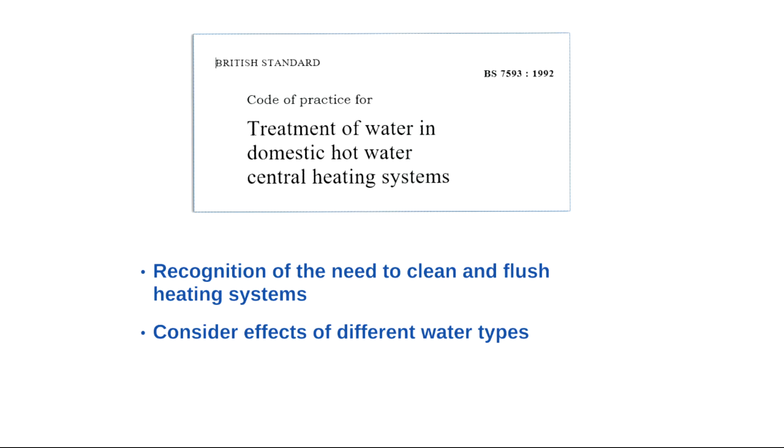Why is 92 important? Well, 1992 is the first year that British Standards released a code of practice for treatment of water in domestic hot water heating systems. This is BS 7593. So back then, what were they saying? Well, firstly, they were saying that they recognized the need to clean and flush a heating system. Secondly, they asked you to consider the effect of different water types on a heating system, whether that be soft water or hard water.

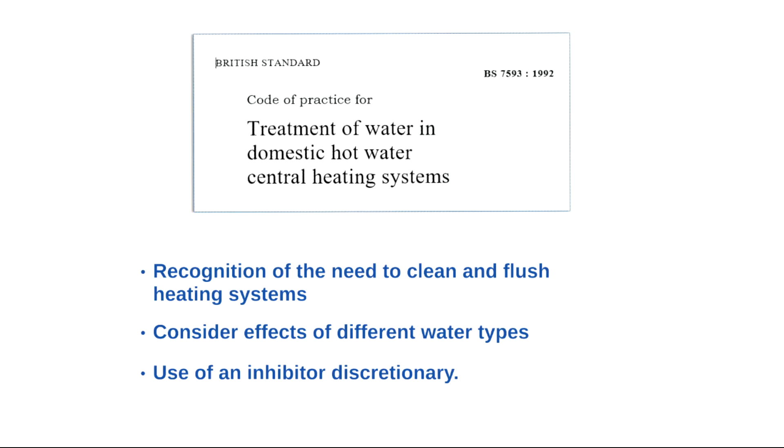Thirdly, but most important, is that they actually left the choice of whether or not to use an inhibitor to you guys, to the installers. It was only discretionary. It wasn't included within the code of practice. So we've moved on from that point, surely, haven't we?

Well, I guess all you guys have, because you're sitting here watching a best practice water treatment webinar, and I guess if you haven't moved on from that, then you wouldn't be sitting here now. But actually, many systems installed today are still installed not with 1992 recommendations, but actually pre-1992 recommendations.

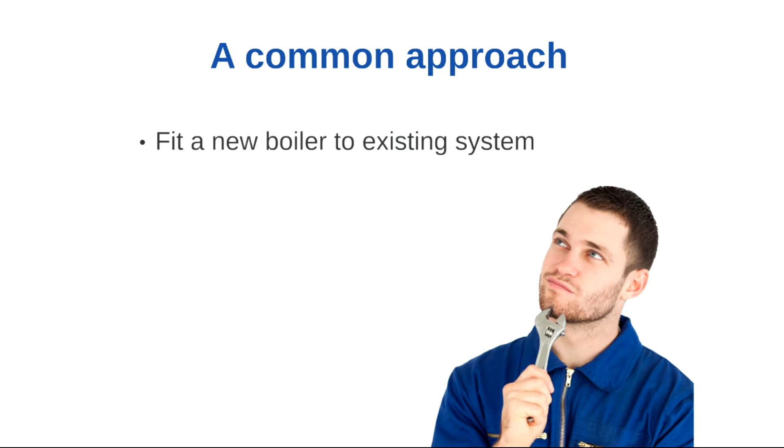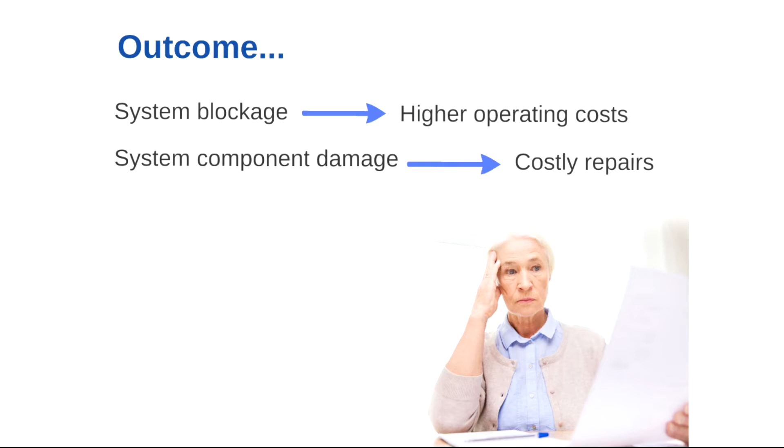So, in fact, it's actually quite common to find that someone will fit a new boiler onto an existing heating system, just simply allow for any energy efficiency losses. They won't bother to clean the system, and then just repair and maintain that as and when it's necessary. Now, all you guys, professional heating installers, will know the outcomes of that quite clearly. System blockages leading to high operation costs, system component damage, costly repairs, but probably most important of all, the heating isn't going to be available for your customer as and when they need it.

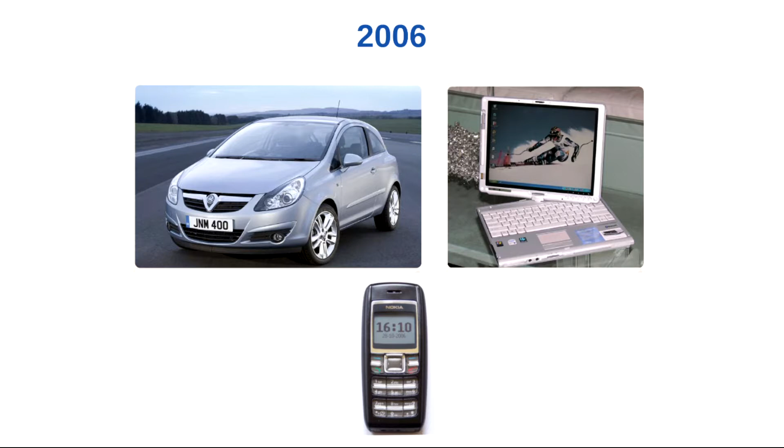So let's jump forward to 2006. So here we are 14 years later, and What Car are now advising you to go out and spend your money on a Vauxhall Corsa? Fujitsu had this marvelous PC with a whole 1 meg of memory, and fortunately the Nokia 1600 slips a little bit easier into your pocket.

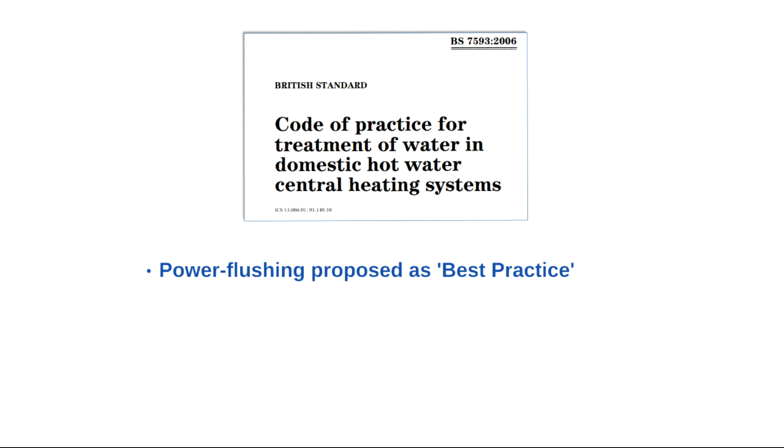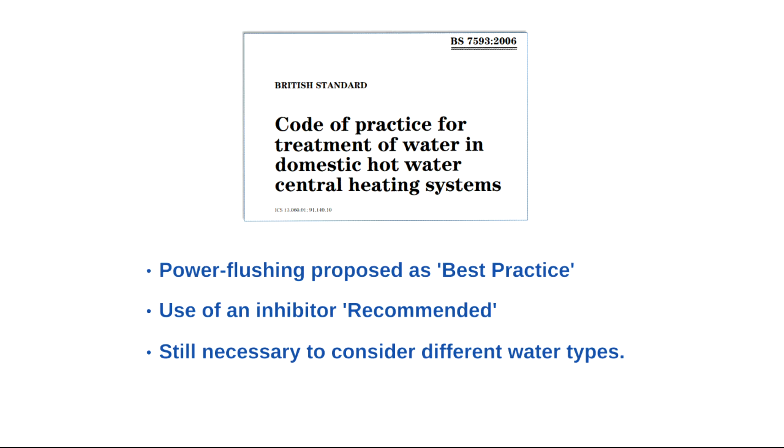This is the year when they made their next amendment to BS 7593. So what did they then bring in? First of all, they proposed that power flushing was the recommended best practice for cleaning a central heating system. Now think of that. Power flushing was proposed as the best practice back in 2006, 10 years ago. Use of an inhibitor is now recommended within this code of practice, but it's still necessary to consider the different types of water that you may be filling your heating system up with.

Well, we all know that power flushing, the recommended best practice, is still used very much today. And if you power flush a system, absolutely you'll be able to get the system clean. However, you have a high purchase price for the equipment in order to do the job. You can spend upwards of 5 hours on site to undertake a clean in a normal domestic building. And of course, the more time you spend on site, the higher the cost is going to be that you need to pass on to your customer.

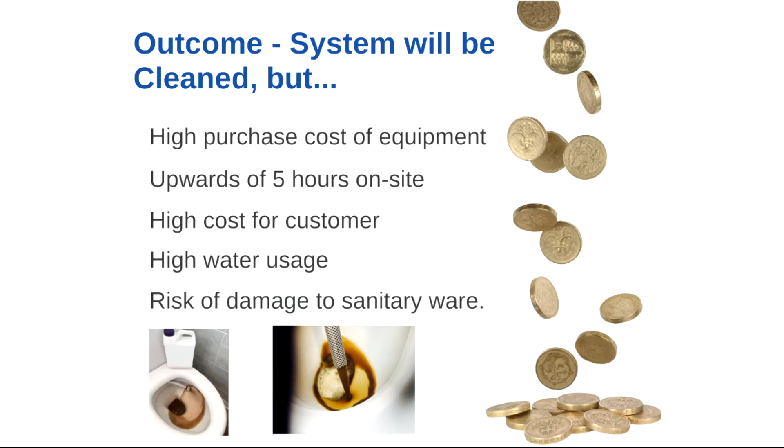You have high water usage due to the dynamic flushing process involved within power flushing. This is where you're constantly filling up the system as you flush the dirty water to drain. And you have risk of damage to sanitary ware. Again, this isn't recommended practice, but it's actually quite common to see that somebody will stick the outflow from a power flush down the nearest available entry to drain, which is very often the customer's sanitary ware.

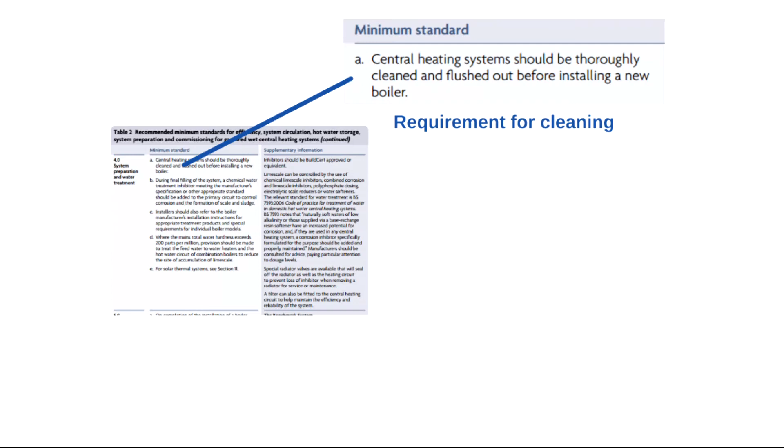So where do we look today for best practice in heating systems? Well, the first place we can look is in the Domestic Building Services Compliance Guide for Part L of Building Regulations. The interesting point is that now this is starting to talk about water treatment within regulation rather than within recommendation. So let's have a look at what they say inside here. Firstly, they say that a heating system should be thoroughly cleaned and flushed before installing a new boiler. So there is a requirement for cleaning.

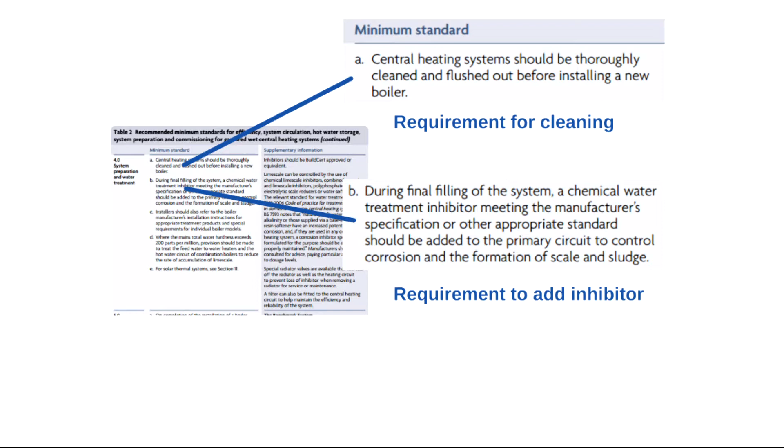There's also a requirement to add an inhibitor. So we're now saying that during final filling of a system, a chemical water treatment inhibitor meeting the manufacturer's specification or other appropriate standard should be added to the primary circuit to control corrosion and the formation of scale and sludge. They also now give a recommendation to include a filter on a heating system. So we're all moving in the right direction.

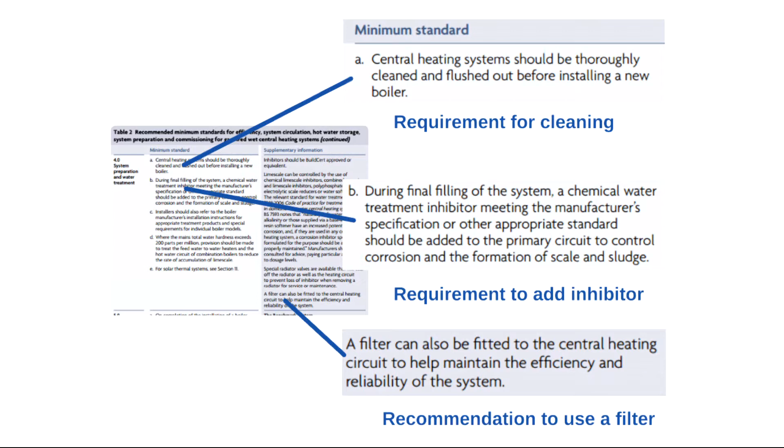Where else can we look? Well, we can look to the HHIC, the Heating and Hot Water Industry Council, who publish advice on their website of the correct use of water treatment. So what do they say?

Well, firstly, they say that a system should be cleaned and an inhibitor added to prevent corrosion and the formation of limescale. They also say that you should fit a filter, not a recommendation. You should fit a filter to maintain the efficiency and reliability of the heating system. They get a little bit more technical on the types of water, and they give some specific advice.

And that advice is, if you have a water softener installed in your house, you should fill up your heating system via the bypass that should be fitted when you install the water softener. So that actually shouldn't be any more onerous for you guys as installers to do when filling up a heating system.

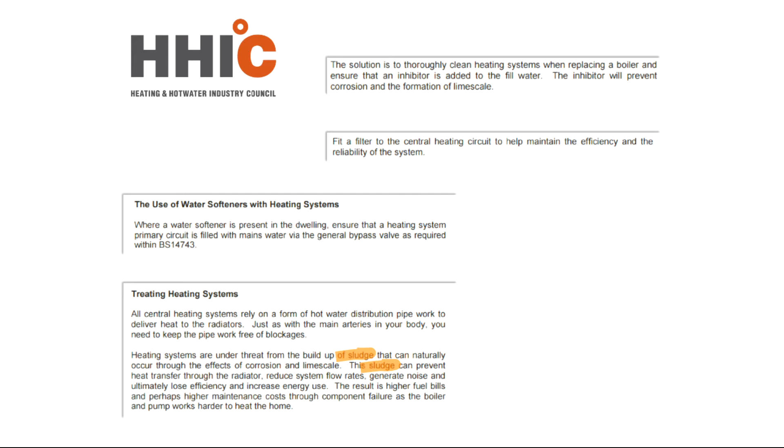Equally importantly is they start to really recognize that there's one component within a heating system that causes you most of your problem, and that is sludge. Sludge is the magnetite, the black magnetite sludge that you find within a heating system, which is the corrosion product of iron. This is an iron oxide. It develops within a heating system, specifically within radiator panels. Very, very big source of

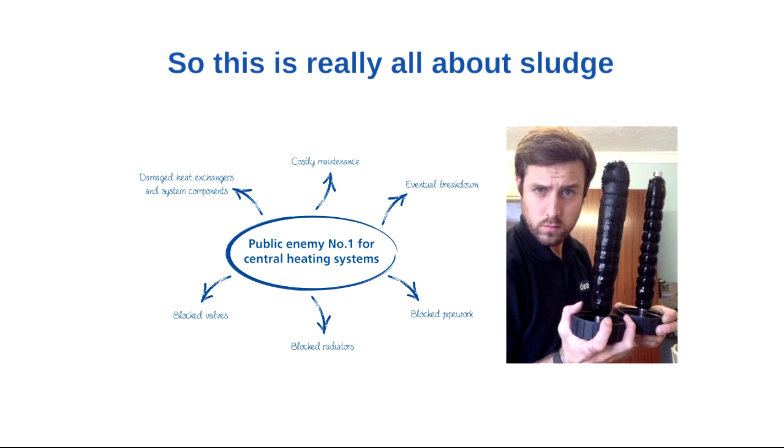sludge within the system. So really, when you're talking about cleaning out a system, the most important thing you need to do is to get rid of this sludge. This is what actually causes you all of your blockages, all of your breakdown, erosion of your components within a heating system. It's all about sludge. So how big, really, is that problem?

Let's have a look. Hi, it's Paul Daly from Daly Plumbing and Heating in Leeds. Today we're going to flush a system out using the new ADEY MagnaClean MagnaCleanse. We've got it connected into the return pipework at the boiler, and I'm just going to start now agitating the radiator to disturb the debris that's inside, and then we'll go and have a look at the pipework and see what's happening. Just been agitating the ground floor radiators, and we're just going to check the filters now and see what condition they're in.

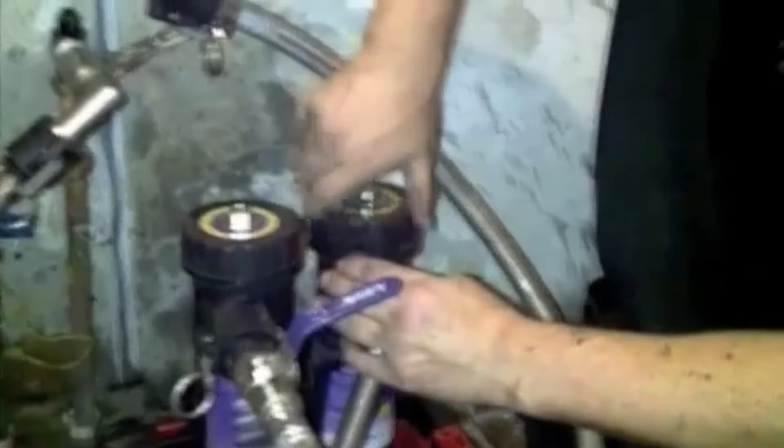Unscrew this and let's have a look in here. Oh my goodness me. I can't believe how much dirt is in this system and how well this MagnaCleanse is extracting that dirt. It's unbelievable. All that, it weighs an absolute ton. All that's passing through the boiler.

Now, at this property, it has had known problems over the last couple of years where it's been losing pressure and it's had frequent top-ups. That encourages corrosion in the system because it's diluting any protection or inhibitor that's in the system. That has got to be the best one that we've seen so far. But let's have a look at chamber 2.

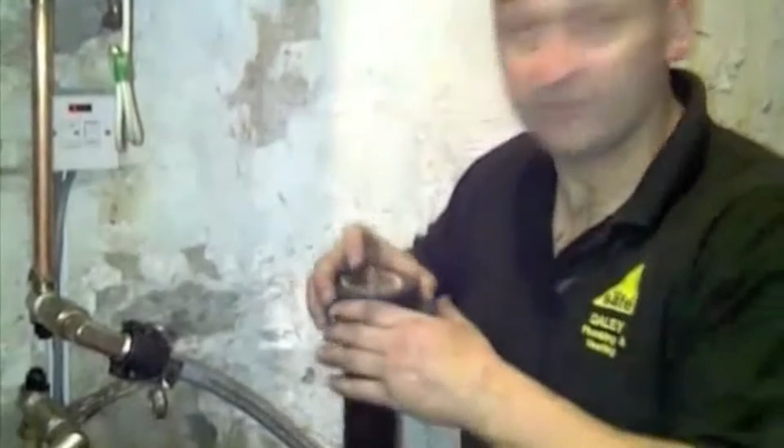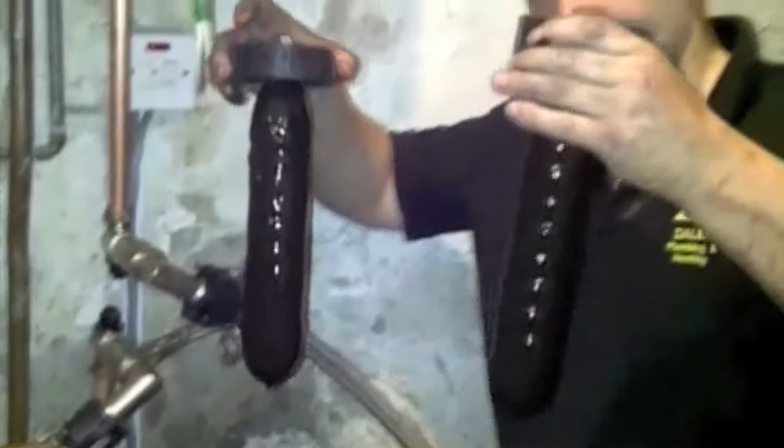That is just unbelievable. Hello, we've just completed the second level and we're just going to have a look at the filter. It's just unbelievable. Can't believe how much muck's in this system, but I cannot believe as well how well this MagnaCleanse is doing. Fantastic piece of kit, removing all this dirt.

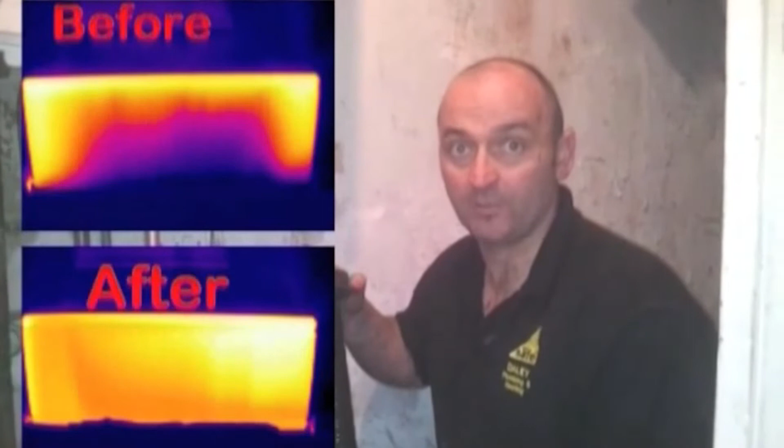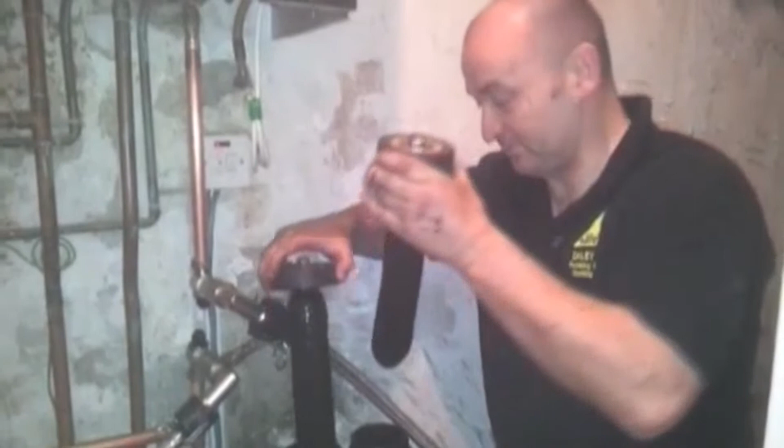You'll see from some of the thermal images that I put on to this video that some of the radiators were suffering from what we call pyramiding, and that accounts for all this magnetite that's built up. So I'll undo chamber 2. And chamber 2 is just as bad.

We've just completed the final level, which is the top floor, where there's only 3 radiators on that level. Let's have a look at what we've got. So all that out of just 3 radiators.

Absolutely fantastic. What's really interesting is that within that one heating system, Paul Daley takes out nearly 5 kilograms of sludge. That's a hell of a lot of sludge to be moving around anybody's central heating system. So let's have a look to see some of the damage that can cause within a heating system.

Now, this graph here looks at the failure of central heating circulator pumps from one of the European manufacturers. What's really interesting is that the 3 main causes of breakdown of the central heating circulator are all down to problems with the system water. So that's wearing of the shaft, limescale, or deposit within the heating system. All of those, 90% of the failures are down to problems with the system water.

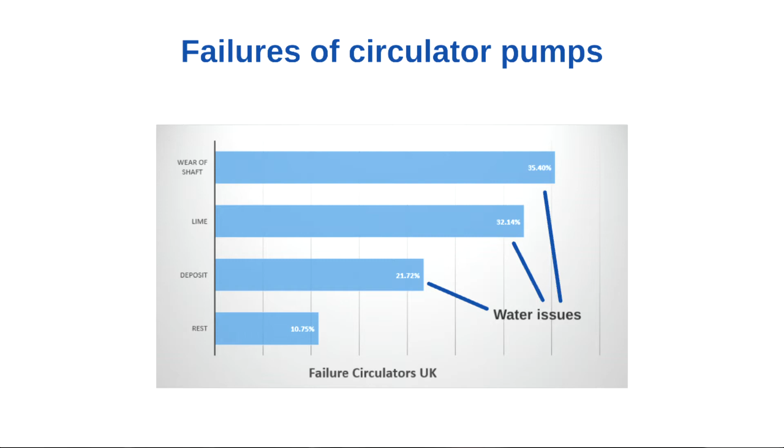So what can we do about it? Well, obviously, the first thing we can do about it is effectively clean the heating system. Now, there are 4 elements to an effective clean. You need a chemical, you need agitation, you need heat, and you need time. And you can balance some of these elements off against each other.

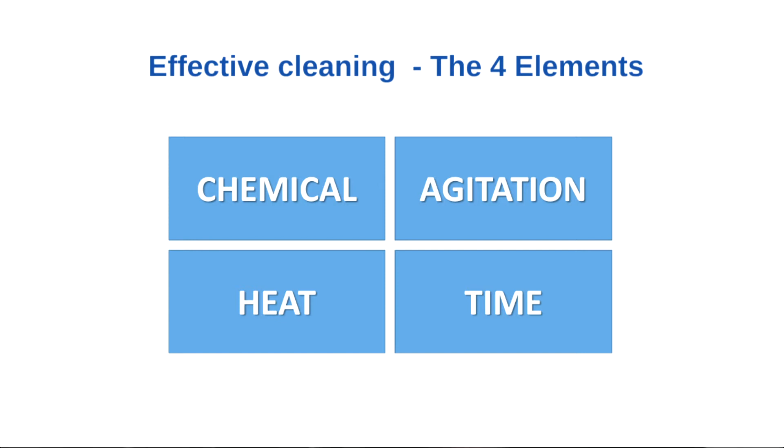So you all know that if you're trying to do the washing up at home and you haven't got enough chemical, enough washing up liquid in the bowl, you have to scrub the pans a bit harder. Or you put in a bit more hot water and that speeds up your cleaning process. Now we can do exactly the same within a central heating system. So firstly, we can increase the value of the chemical. And you do that by using a premium quality optimized cleaner for central heating. So we increase the chemical part of these 4 elements.

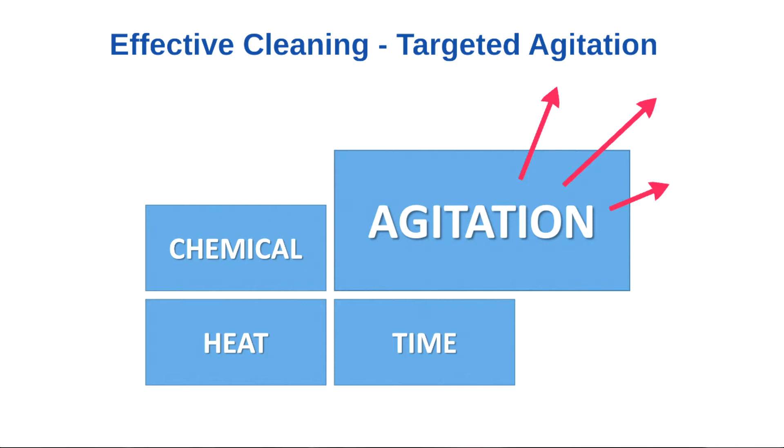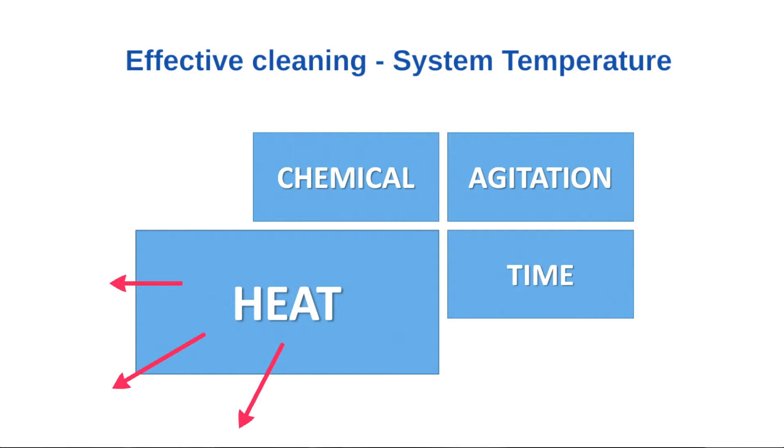Second thing you can do is you can agitate the heating system. And the way that we do that is you can agitate by targeting the magnetite that collects at the bottom of a radiator. Third thing you can do is you can run the heating system at full system temperature. And you can do that by, even during the cleaning process, you can protect the new boiler by ensuring you have a cleaning process that has very, very effective first pass magnetic filtration on it. And if you increase all of those 3 elements, the benefit for you guys is that you can reduce the amount of time it takes to do that clean.

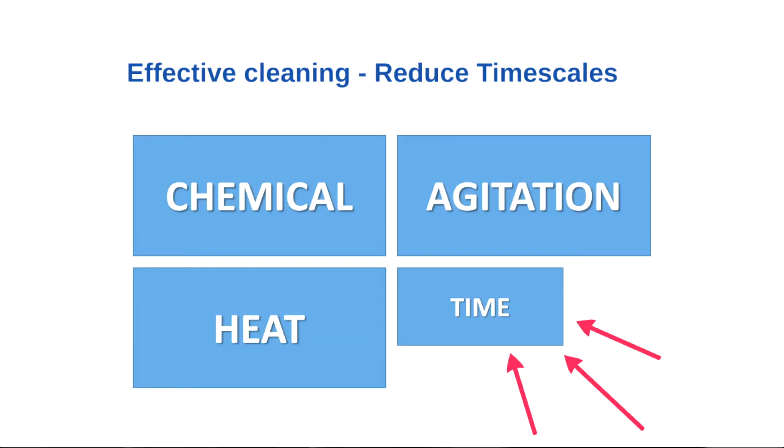So let's have a look at some of the cleaning process advances that have happened since 2006. Firstly, we know that you need to get sludge out of the system, so we developed a sludge targeted cleaning process. That's a cleaning process that goes in and physically removes the sludge from the system rather than simply diluting it down and sending it off to drain. We can run the system at normal system temperature with minimal risk to the new boiler. So you can install the new boiler before you undertake the clean. You can include agitation at the bottom of the radiator.

And because you're now targeting that sludge, you're removing it, you want to see when it's removed so that you can optimize your speed of clean. And in order to do that, you need a window on the system. You need to be able to see when that sludge has been removed. And because you're removing the sludge, you haven't got this need to constantly be trying to dilute the system water, sending it to drain, dynamic dilution. Therefore, you minimize the amount of water you use. You're not constantly flushing to drain. And the other advantage of that is it ensures that your chemical cleaner remains concentrated within the heating system all throughout the cleaning process.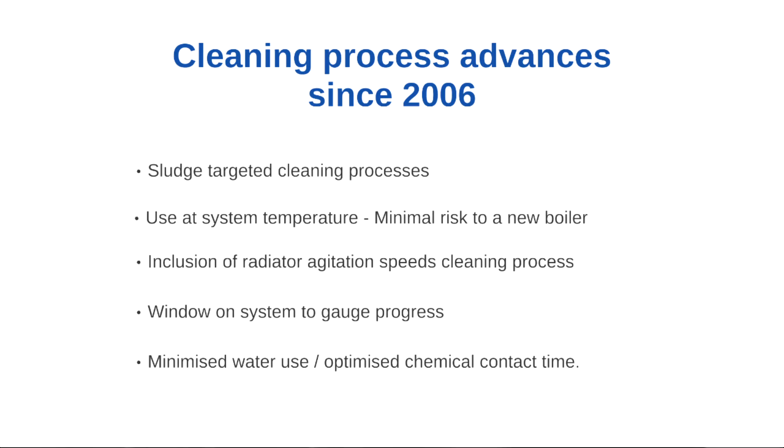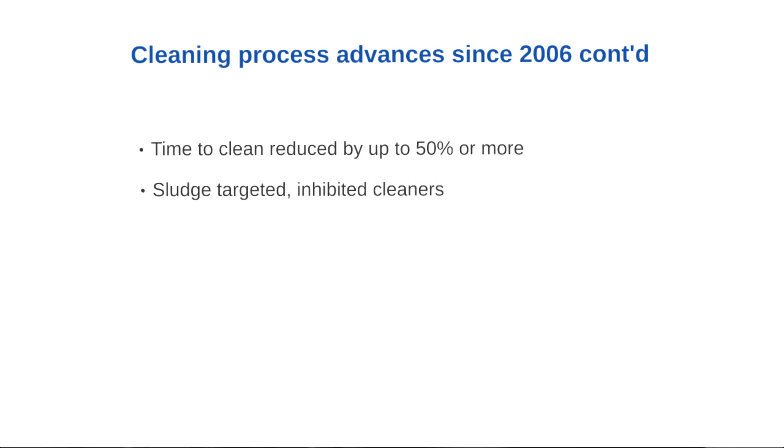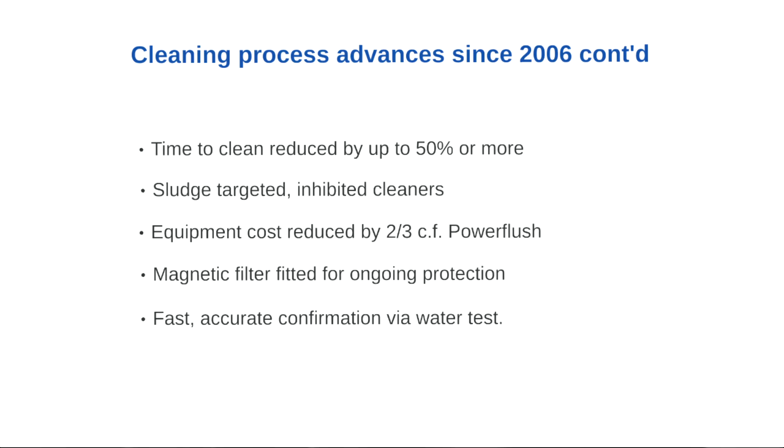Now, a big advantage of doing that is that you can reduce your cleaning time by 50% or more. We now have sludge-targeted inhibited cleaners, which can reduce the amount of time even further. And really importantly as well, you would expect to pay more money for a more modern cleaning process, when in fact it's the other way around. You'll pay about 1/3 for a MagnaCleanse process as what you would typically pay for a power flushing machine. You would add a magnetic filter for ongoing system protection. And you would confirm that the clean has been done correctly using a fast, accurate water test.

So let's have a look at what a best practice cleaning approach looks like, incorporating a good chemical, targeted agitation, and running the system at system temperature. MagnaCleanse transforms traditional power flushing. It sets the standard for best practice maintenance and energy efficiency for central heating systems. With MagnaCleanse, it's now possible to carry out a system flush from as little as 2 hours. It delivers effective results with ongoing system protection. Let's take a closer look.

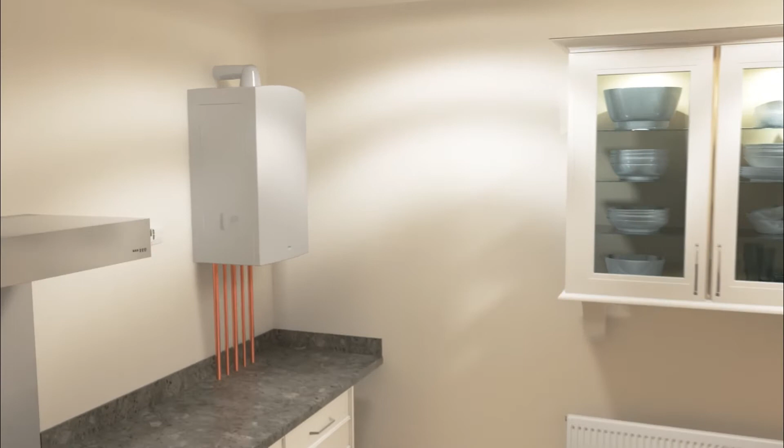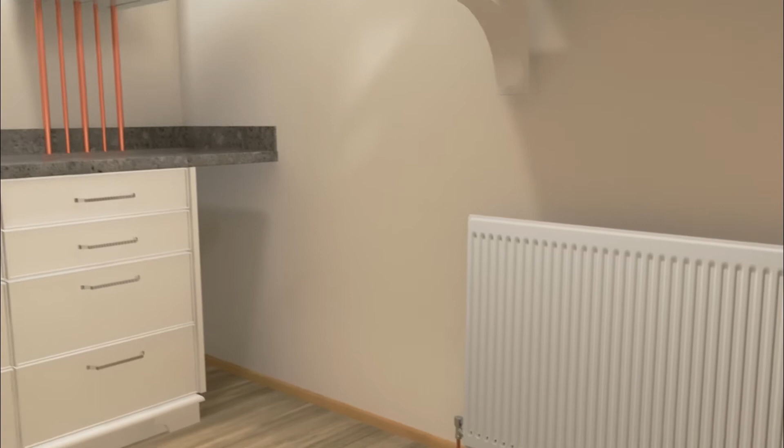This boiler has been overheating and cutting out. A number of the radiators are experiencing cold spots. The thermostat has been creeping higher and higher to keep the room temperatures at the required levels. MagnaCleanse has been recommended, and installation of a MagnaClean filter for ongoing protection. Complete all relevant preliminary safety checks. Isolate the system and drain.

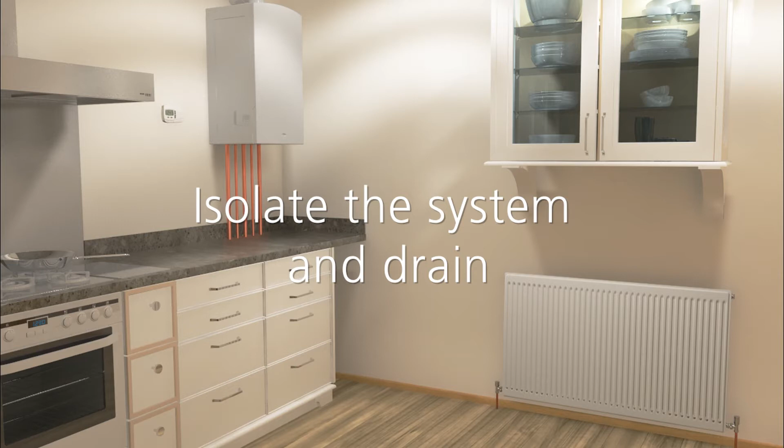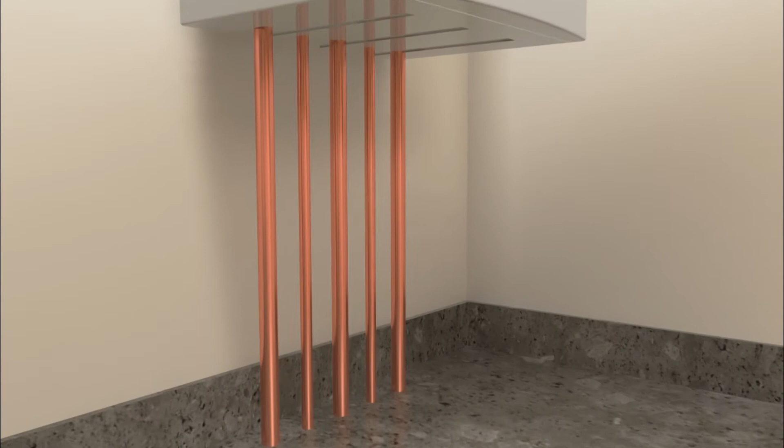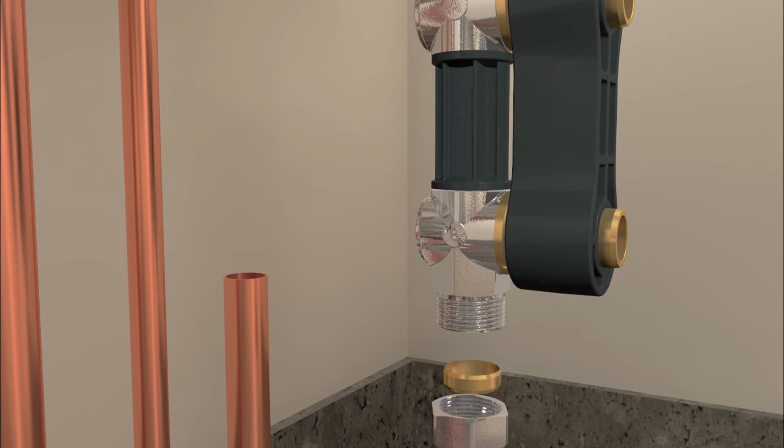In order to achieve the best protection for the boiler, it's recommended that MagnaCleanse Rapid Flush Filter and MagnaClean are connected to the return pipe of the system. Installing MagnaClean Professional 2 is quick and can be achieved in a couple of minutes once the system's drained. After draining, mark a 150mm section of pipe. Remove lower isolation valve nut and olive and secure to lower pipe connection. The slip socket design on the valve connector enables easy installation. Ensure both compression fittings are fully tightened.

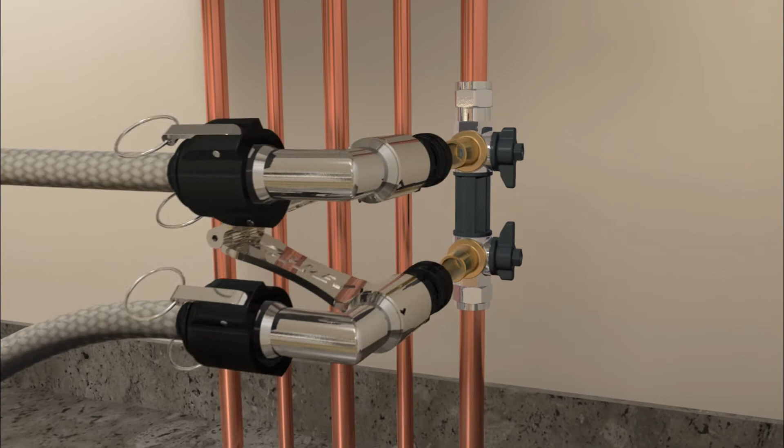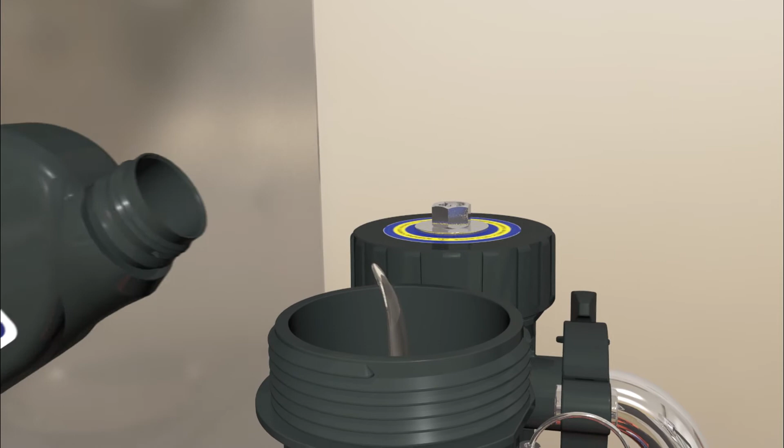Remove the valve alignment tool. Replace with the quick release trigger and canister. Remove the filter and attach the MagnaCleanse hoses between the rapid flush filter and the MagnaCleanse hose to valve connector. Add ADEY's MC5 cleaner to the system. This assists in breaking down the sludge and lifting and carrying the debris back to the MagnaCleanse rapid flush filter. With MagnaCleanse, the chemical is heated, enhancing the performance of MC5, as the reaction rate doubles with every 10 degrees increase in temperature.

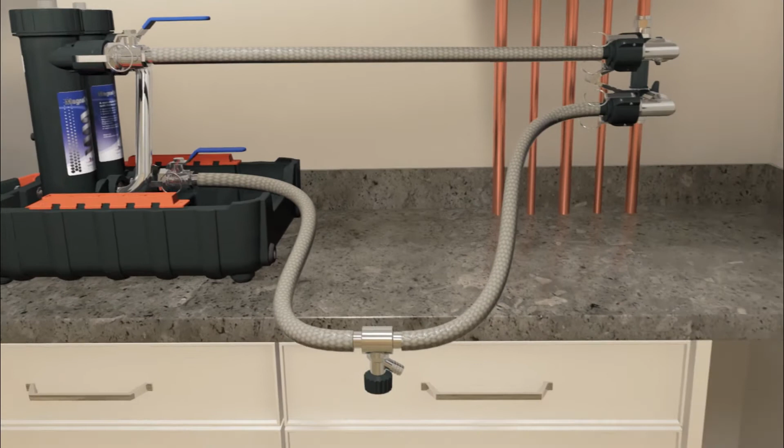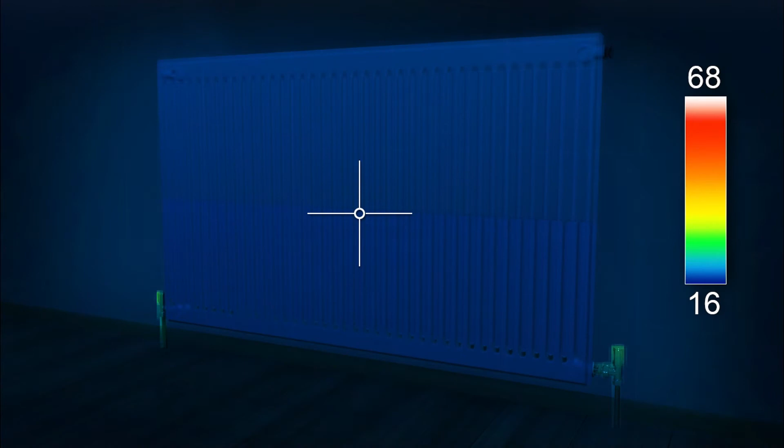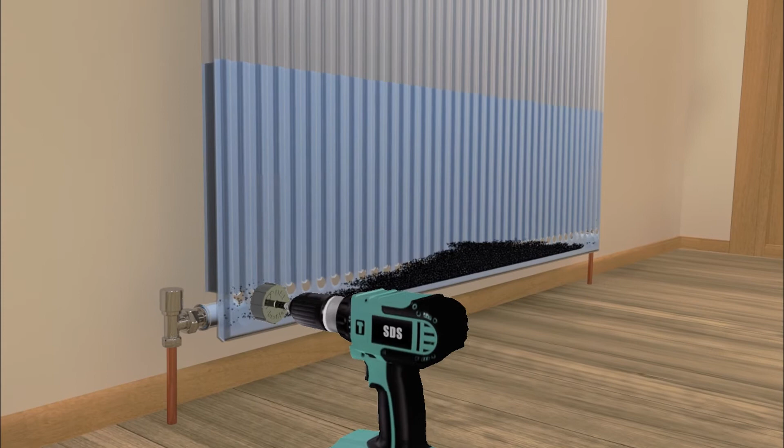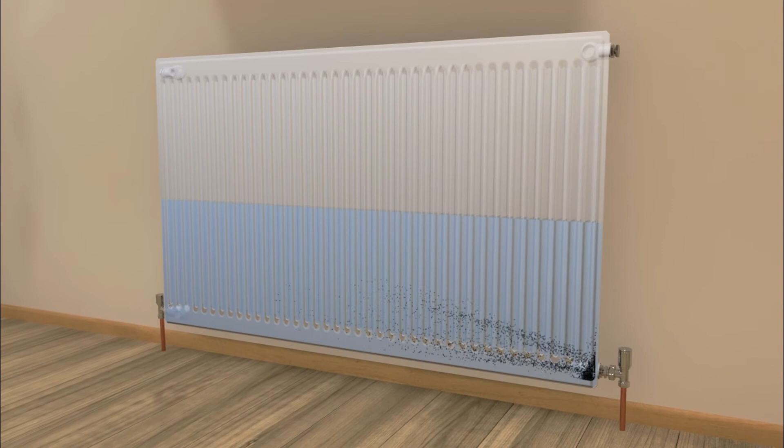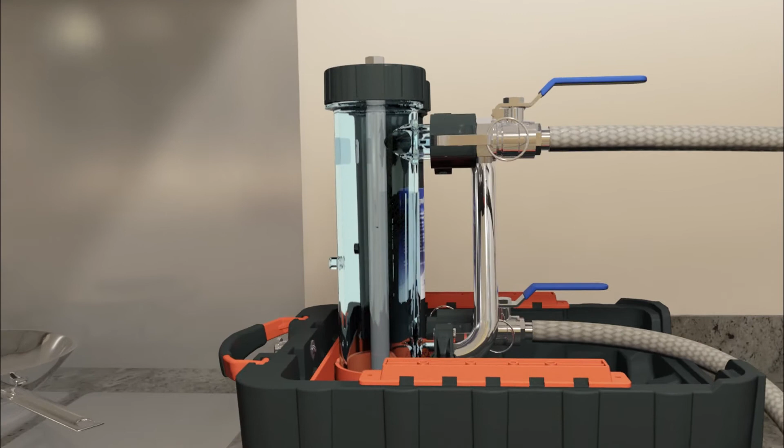use ADEY's VibraClean tool attached to an SDS drill set to hammer-only mode and agitate each radiator for 15 to 20 seconds. When using the VibraClean agitator with the MagnaCleanse process, more sludge is removed in 20 seconds than 30 minutes of operation without VibraClean. The filter consists of a unique swirl chamber, in the center of which sits a powerful magnet. The high-efficiency filter removes virtually all suspended boiler debris in one pass.

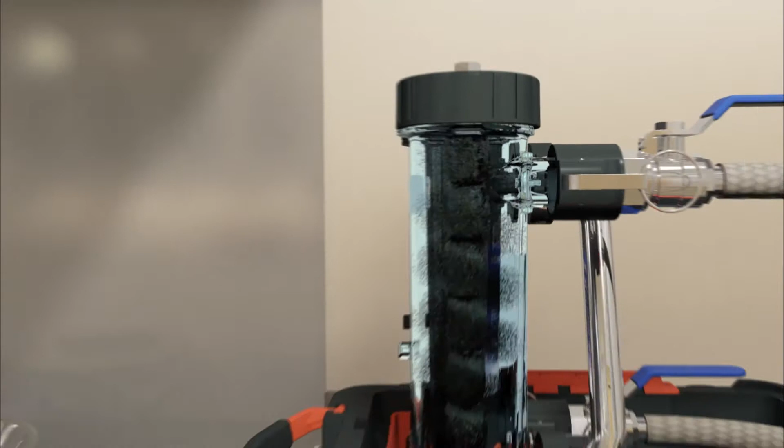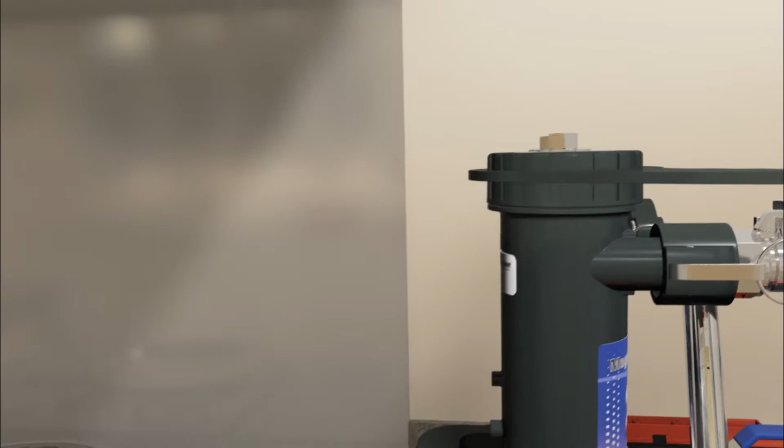When satisfied, open up the next radiator. Turn off the treated radiator and repeat the process until all radiators are clean. Isolate and clean the rapid flush filter as required. Using PPE, that is, gloves and a paper towel, wipe off any magnetite into a bucket or waste bag and dispose of correctly. Drain the whole system using the drain valve, removing any residual cleanser and non-ferrous deposits.

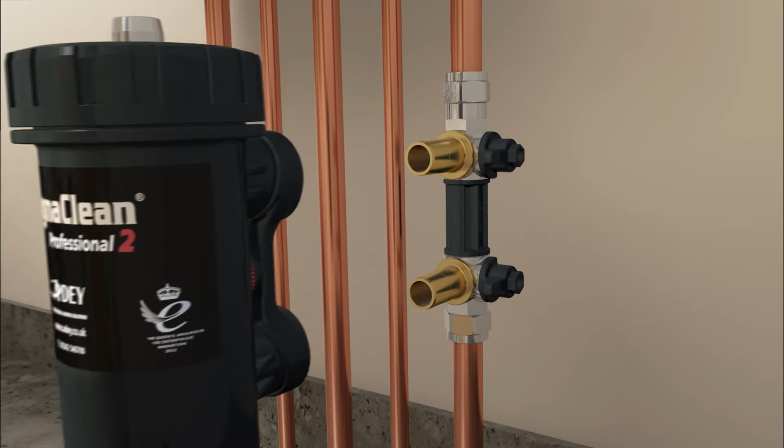Disconnect hoses and remove the rapid flush filter. Reattach the MagnaClean domestic filter to the isolation valves. System dosing is easy. Simply use the canister as a dosing vessel to add MC1 protector into the system. Now, fill the system radiators to full, removing all air. Turn on the system and reset the controls to the customer requirements. Open any bypass valves previously closed.

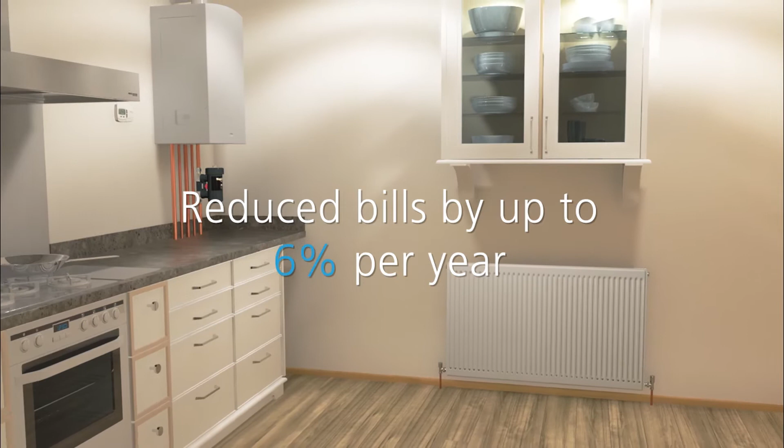Before leaving the property, carry out the last job. Service the MagnaClean filter, ensuring a final check is carried out for leaks. With MagnaCleanse, the complete solution, the benefits for customers are immediate. Reduced energy heating bills by up to 6% a year. Gas savings of up to £66 per year at current prices. Reduced carbon emissions of between 200 to 300 kilograms a year. Reduced maintenance costs. Warmer radiators with a quieter, more efficient heating system.

MagnaCleanse transforms traditional power flushing. It sets the standard for best practice maintenance and energy efficiency for central heating systems. So it's not just processes that have advanced through innovation since 2006. We see advances in the chemistry that we use as well. Firstly, formulations are available now, chemical inhibitor products, chemical cleaners that treat 125 litres per bottle instead of 100 litres.

Why do we do this? Well, we asked you guys. We asked installers how big the systems were that they treated, and we were told if we produced a product which treated 125 litres, that would cover about 98% of all of the systems that you would typically treat. So that means you can now use the one bottle per system rule of thumb with a lot more confidence.

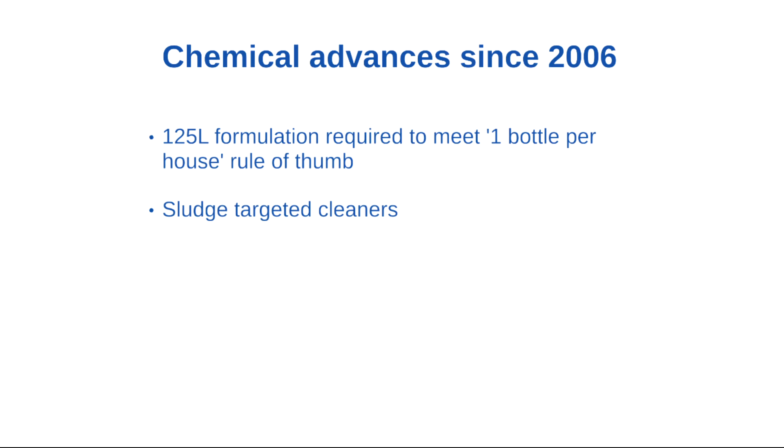You can have sludge targeted cleaners. So there's specifically a cleaner that goes in, lifts up the sludge, holds it within a matrix until it's ready to be delivered to the filter to be removed. We have inhibited cleaners. Now, the advantage of an inhibited cleaner is that you can put it into somebody's heating system up to a month in advance. So it starts the cleaning process, but because it's inhibited, it protects any vulnerable components at the same time. That gives you guys a lot more flexibility in determining when you need to come and do the clean once you've actually got the agreement to do the job.

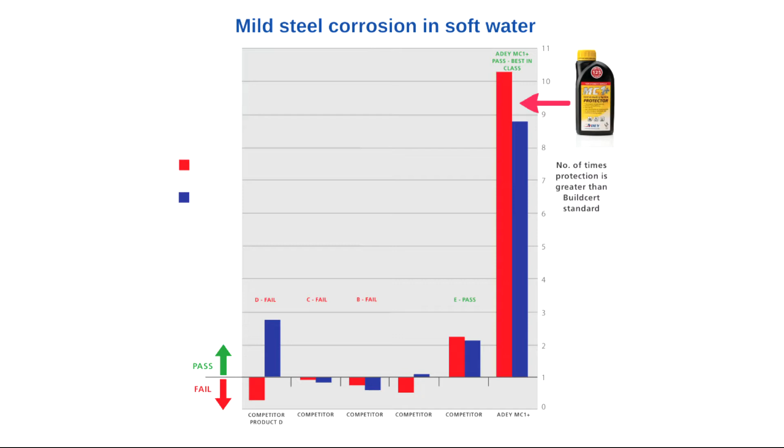The other thing that we do is we performance test our products every single batch that we make. So you can be sure that if you put our product in, you're getting between 8 to 10 times, as this graph shows, the protection that you're being asked to provide as an inhibitor manufacturer to meet the BuildCert standard requirements.

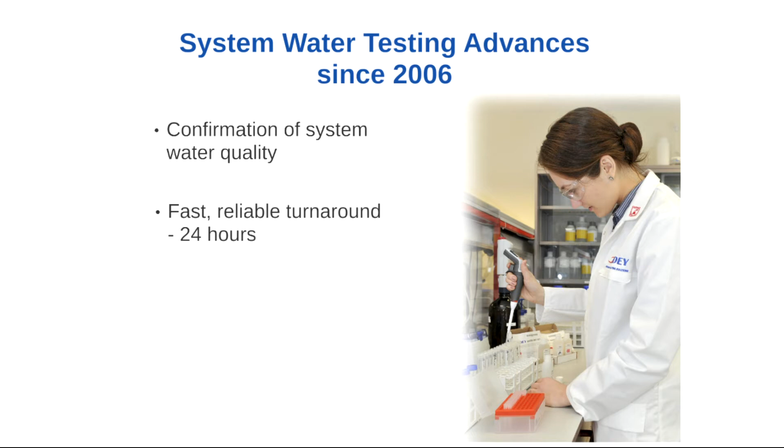Other advances, well, clearly since 2006 there have been advances in analytical chemistry, which has allowed us to put together a very good process lab and analytical lab for water testing services. So you can now confirm how good a job you've done, and you can show a certificate to your customer. This is a very fast service. From the point that your water sample arrives at our laboratory, we can turn that round in less than 24 hours.

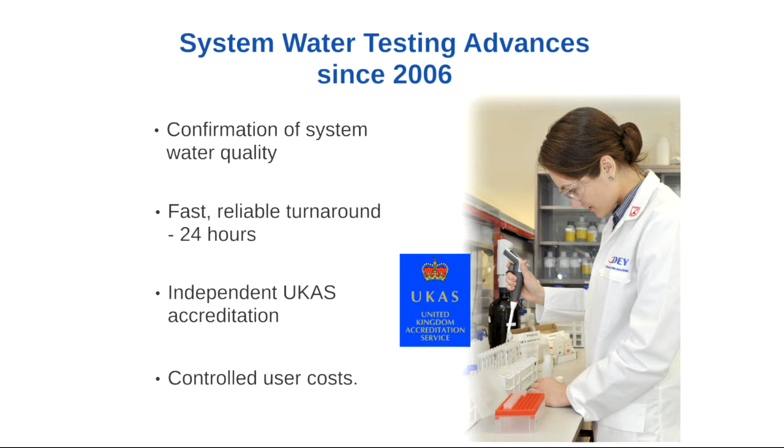It's an independently accredited lab. It's UKAS certified, so that means to say that all of the testing is performed to the highest standards for any analytical laboratory inside the UK. And because it's an internal lab, that means that we get much better cost control, so we're making this process affordable as well as the most accurate.

So what ADEY have done is we've rolled together all of the benefits of the improved cleaning technology together with our improved formulation chemicals and our testing laboratory to come up with what we refer to as the ADEY best practice approach for cleaning and treating a heating system. And industry recognized this, and in 2015, ADEY was awarded by HVM the Service and Maintenance Initiative of the Year for the ADEY best practice water treatment approach.

So let's have a little look at what value this is to you as an installer. Well, the first thing is you have to spend less money to get started, to get equipped to go and do best practice system cleaning. You have an ability to demonstrate how good your cleaning job is to your customer. And we all know the value of seeing something with your own eyes. So your customer can immediately see the benefit of what you're doing and get that buy-in for you.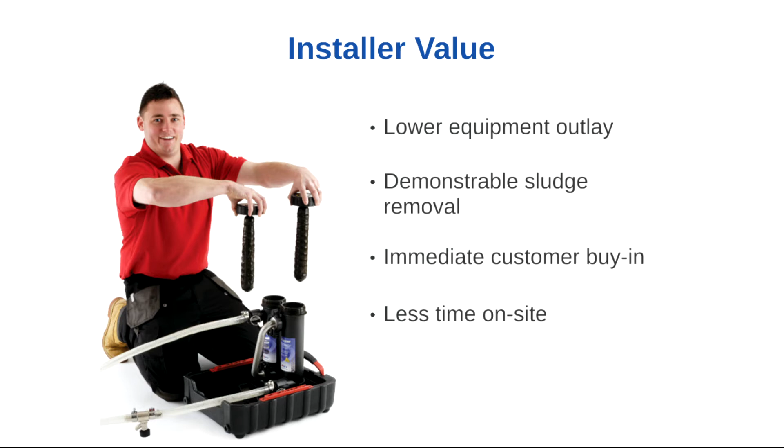You spend less time on site. Less time on site means it actually costs you less money to do the job. So you can actually increase your revenue whilst charging your customer less to do exactly the same job as a power flush.

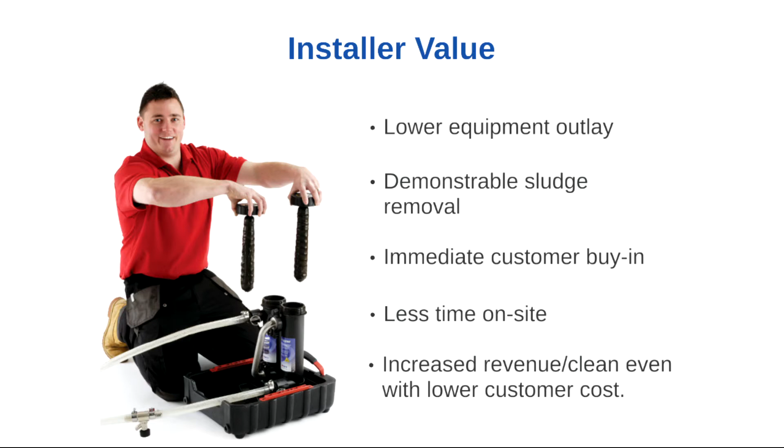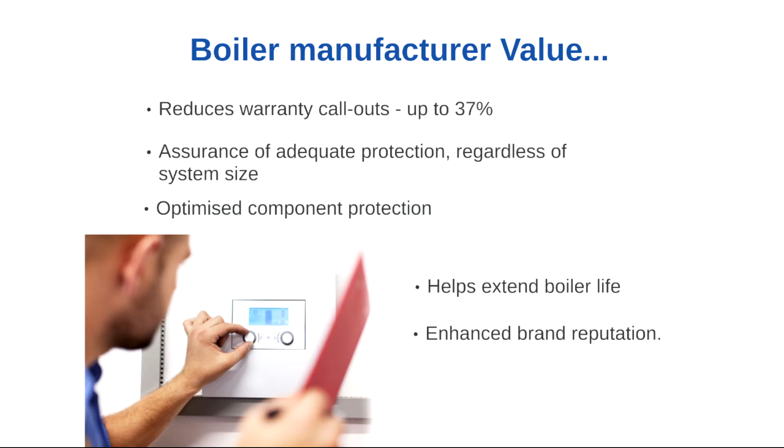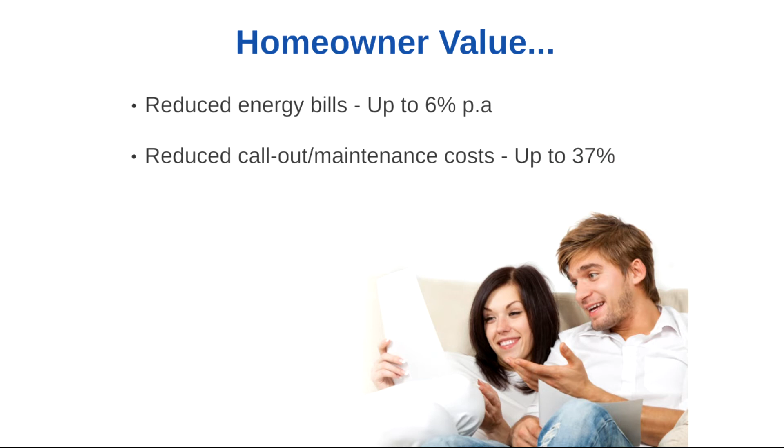And most of all, we're all doing this for the homeowner. So let's just consider the value for the homeowner. Reduced energy bills by up to about 6% a year. On current energy costs, that'll save them around about £66 per year. Reduced call-out fees, reduced maintenance, estimated to be around about 37%. Reduced carbon emissions, which is important to all of us today. It helps extend their boiler life, and of course, gives them the assurance of heating when they want it, when they need it.

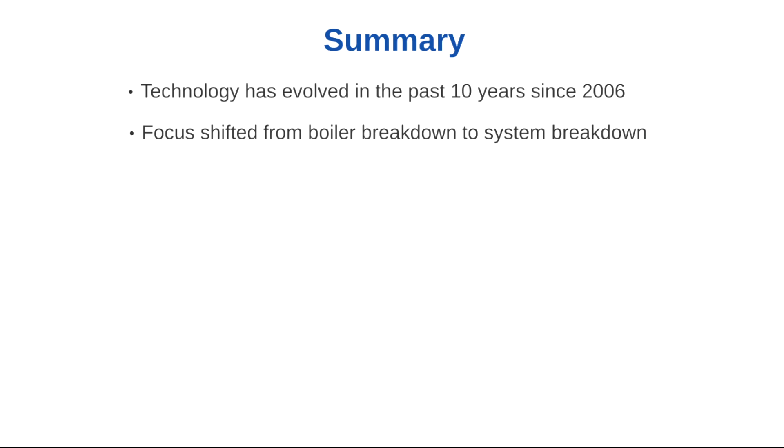So, in summary, technology has evolved in the last 10 years since 2006. The focus has shifted away from boiler breakdown onto system breakdown. The problem is in the system, the problem isn't in the boiler. The magnetite sludge has been identified as the major cause of breakdown within heating systems. There have been innovations in cleaner formulation, in inhibitor formulation, and in sludge-focused cleaning methodologies and equipment.

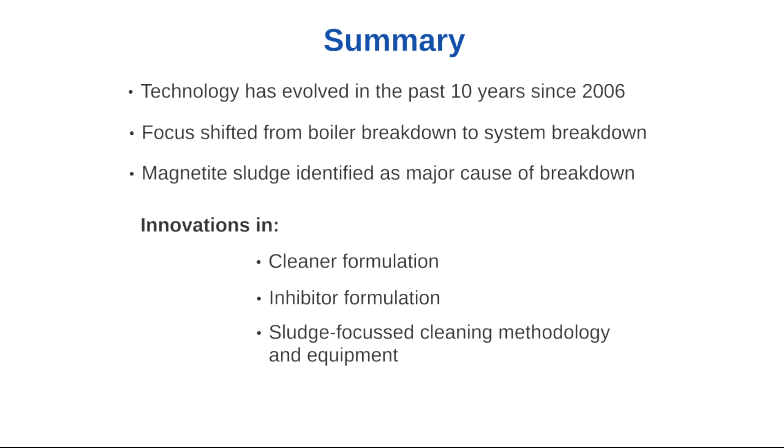And a modern system treatment regime brings added value to you as installers, to the OEMs, and to the householder. So I'm just going to leave you with a question. Which technology is the best fit for you, your business, and your customers?